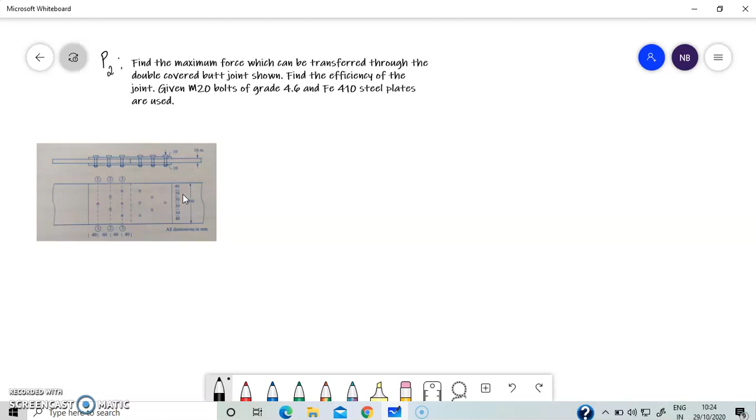See the arrangement of the bolts which are given in the diagram. So we have three sections: section 1-1, section 2-2, and section 3-3. The pitch and the gauge distance are also mentioned. So let us start solving this problem. We have been given M20 bolts of grade 4.6. The diameter is 20 mm. So the diameter of the hole would be 20 plus 2, which is 22 mm.

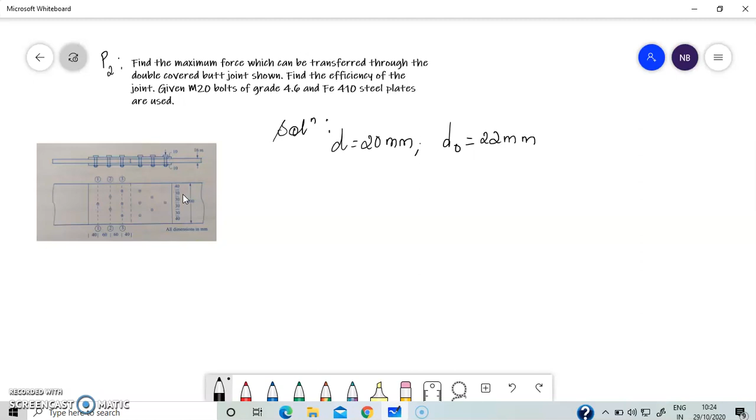fub for 4.6 grade would be 400 Newton per mm square. And for the steel plates of grade 410, the ultimate strength would be 410 Newton per mm square. Now let us calculate the nominal strength of one bolt in shear. Now since this is a double butt joint, there will be two shear planes, therefore this is double shear.

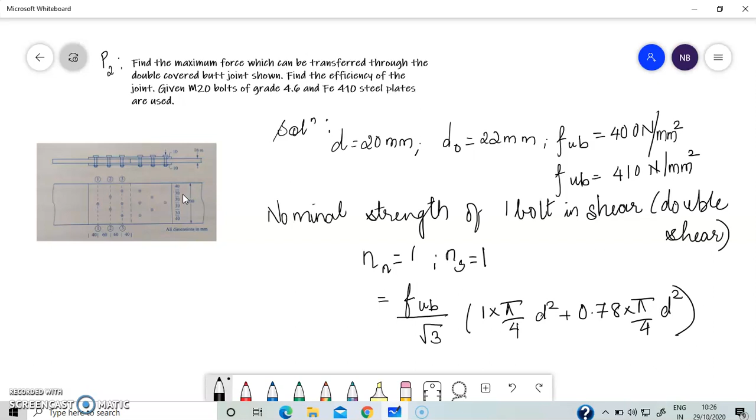We know that in case it is a double shear, then we take nn as 1 and ns as 1. Please go through the notes that were shared earlier. And the nominal shear is given by fub upon root 3 into pi by 4 into d square. So substituting the values for fub and d.

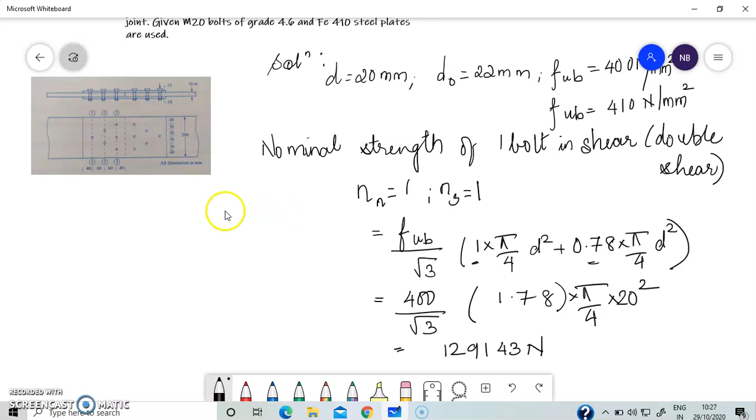Here we are talking about the bolts, that is why the value of fub is 400 Newton per mm square. This 1.78 is because 1 plus 0.78, because we are talking about the same diameters. I take this term common out. Into pi by 4, the nominal diameter is 20. And this works out to be 129143 newtons. This was the nominal strength.

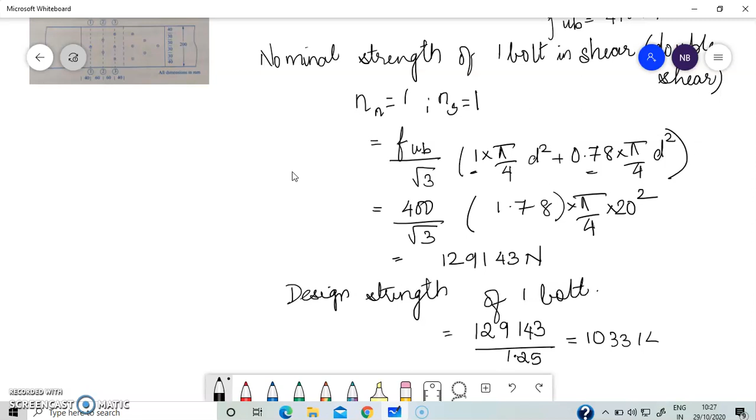Now we need to find out the design strength of one bolt, which is given by the nominal strength divided by the partial safety factor, which is 1.25, and the value of this is 103314 Newton. Now this was of a single bolt.

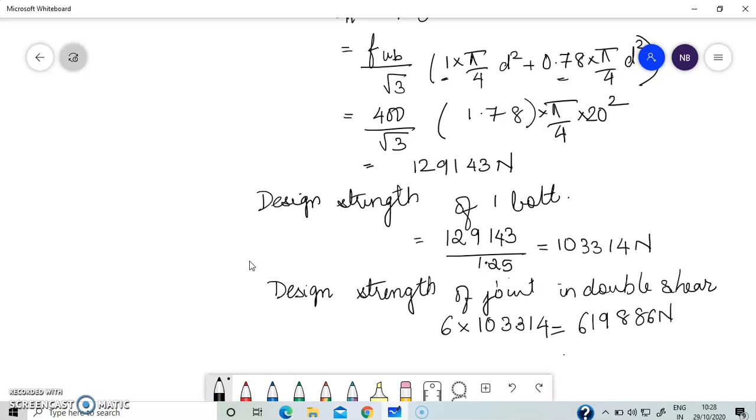If we want to find out design strength of joint in double shear, we have to multiply by the number of bolts. So the number of bolts is 6, multiplied by 103314 will give us 619,886 newtons, which is 619.886 kilonewton.

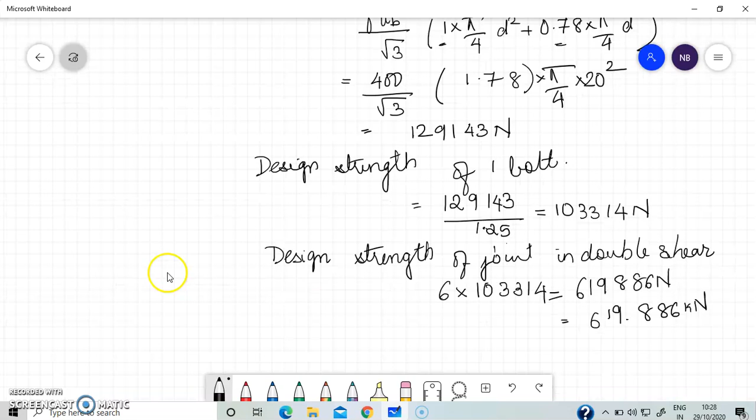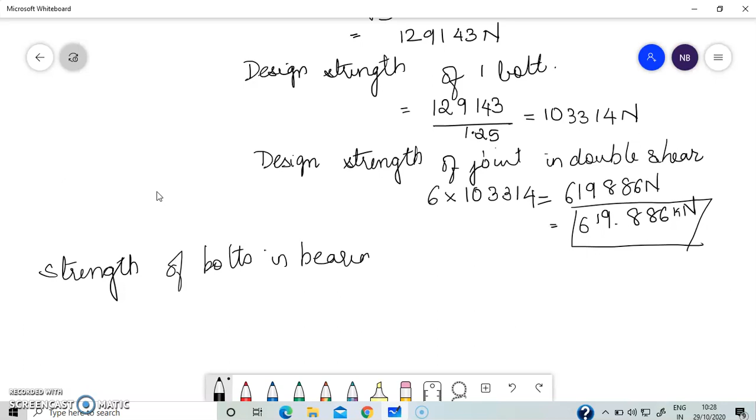So this is shear. Next we need to find out the strength of bolts in bearing. So we need to find out kb, which is the least of e by 3d0, p by 3d0 minus 0.25, or fub upon fu, or 1.

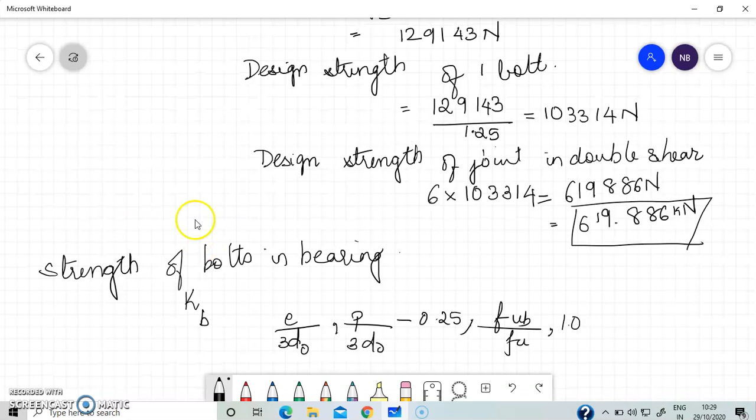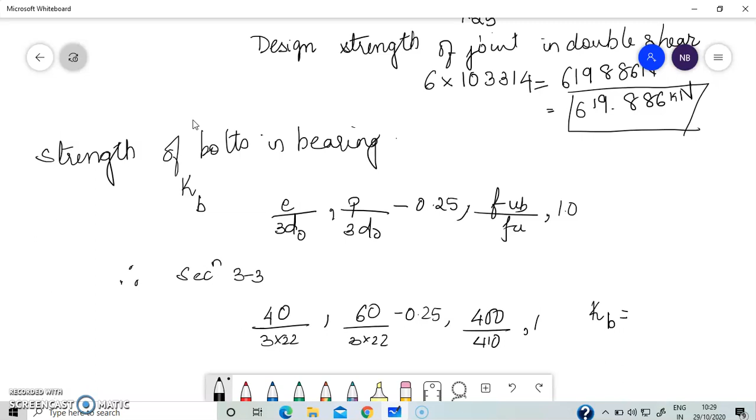Now we have three critical sections here, so we have to calculate for the worst condition. So let us start with section 3-3. The end distance is 40. The pitch is 60. So at section 3-3, the minimum one is 0.6061. The same procedure we repeat for section 2-2 and section 1-1.

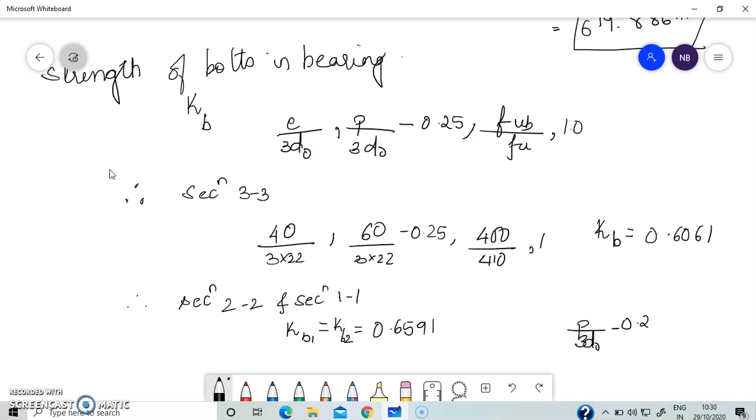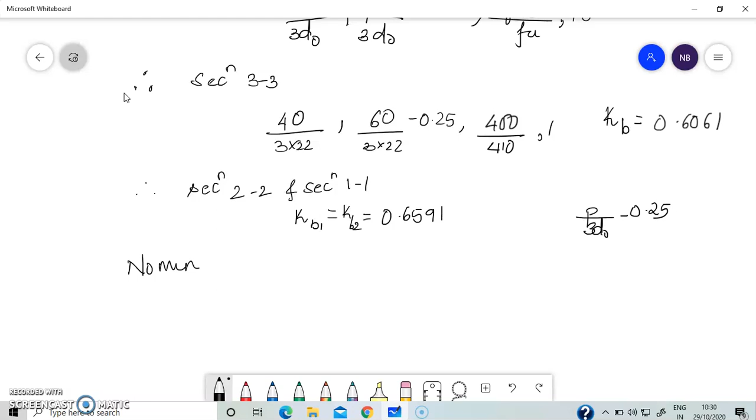Since the value of e is large, kb1 and kb2 work out to be 0.6591, which is governed by p by 3d0 minus 0.25. The nominal strength of 6 bolts in bearing is

plus 3 into 2.5 into 20 into 16 into 410, the value of which is 1244957 Newton. This 3 here in this formula refers to section 3-3. So there are 3 bolts in section 3-3

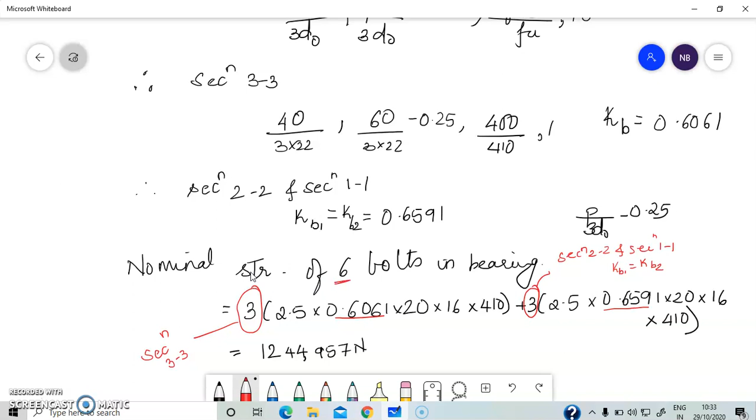and this kb value is corresponding to the section 3-3, whereas this 3 refers to the total of section 2-2 and section 1-1. So this kb value refers to kb1 and kb2, which are equal in this case. Okay, so the number of bolts was 6, so it is this 3 plus this 3 here. Okay, so it is 6. So this is the nominal strength.

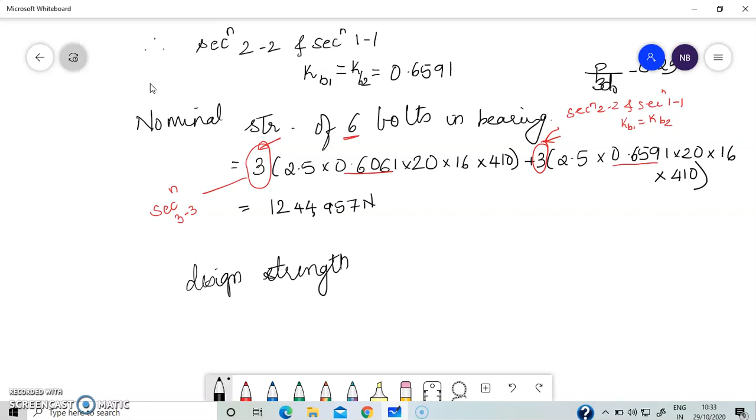We need to find out the design strength in bearing. Design strength in bearing, which is 1244957, that is the nominal strength, upon the partial safety factor of 1.25. 995,965 Newton or 995.965 kilonewton. So this is greater than the design strength in shear.

So if we want to find out the strength of the bolt, it is the minimum of the 2. So the strength of the bolt is 103314 Newton as calculated in shear, and the strength of bolts in the joint is minimum of 2, which is 619.886 kilonewton.

Up till now we have calculated the strength of each bolt and the strength of bolts in the joint. Next we need to check the strength along all the 3 sections. This we will continue in the next video.